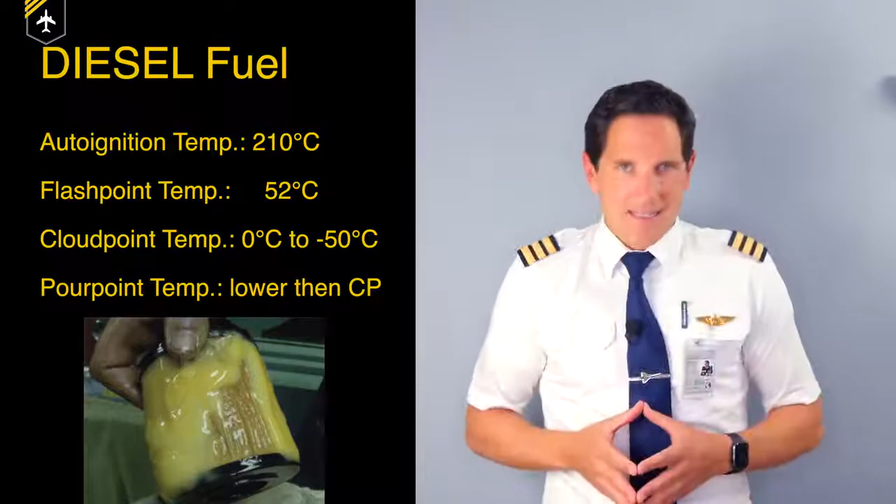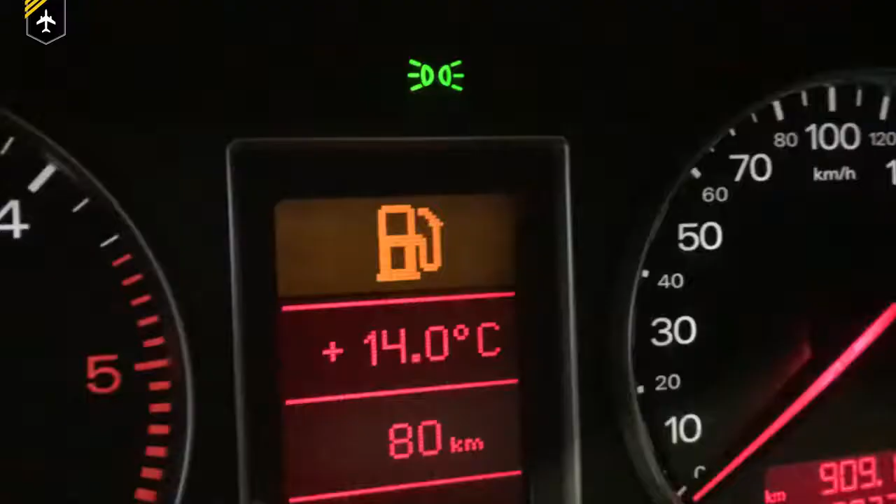Now, if your country is on this list right here, you might have heard of winter, alpine, or even Arctic diesel. Now, what's that? Let's say you were to live in Germany. These are the diesel cloud points you would be dealing with. The summer diesel with a fairly high cloud point temperature. If it were to get any colder, close to the pour point, the fuel would clog up your filter or injection system at those temperatures.

Now, without knowing, as soon as the temperatures become lower towards winter, the petrol stations fill up their tanks with winter diesel with a much lower cloud point of minus 20 degrees, so your car doesn't suddenly stop on the German Autobahn. That means the winter diesel is chemically treated to lower its cloud point, and there is a country which sells diesel with a cloud point of minus 50 degrees.

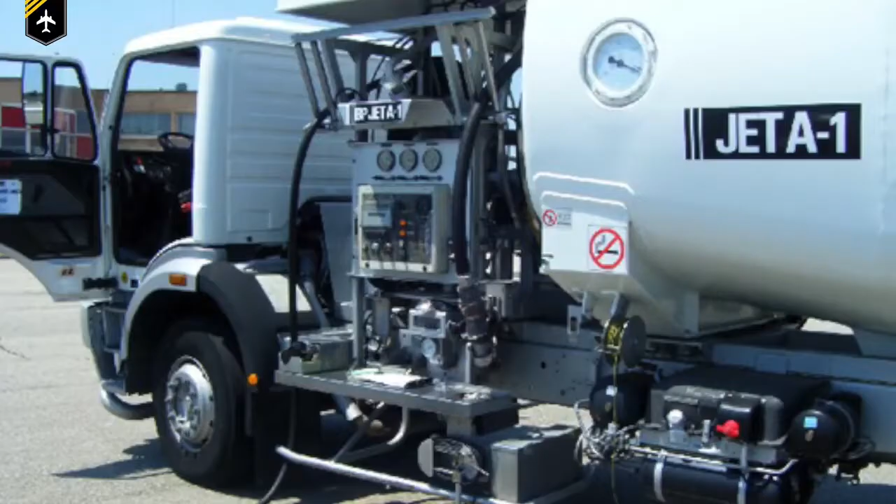So how does this relate to jet airliners? Commercial jet fuel, commonly known as kerosene, is split up into 3 major players. Jet A1, available outside of the US, Jet A, which is only available in the US, and the much more rare Jet B, which is primarily used in military aircraft and found in northern Canada, Alaska, and sometimes Russia, because of its low freezing point.

Now, I said freezing point. The freezing point is similar to the cloud point. The jet fuel becomes cloudy, and if it gets any colder, approximately 6 degrees less than the freezing point, it solidifies to wax. Write this down, as this is a common question in your ATPL theory exam. What is the freezing point of Jet A1? Minus 47 degrees. So it is much lower than your average diesel fuel from the petrol station.

And to all my American followers, yes, it is called a petrol station. I don't know why you call it a gas station. 99% of your cars run on a liquid, not on a gas.

So as the wing tanks of the jet airliner are being refueled, the fuel commonly enters at outside air temperature, let's say 20 degrees. Depending on where you are and how cold it is, fuel sometimes can be preheated before being filled into your wings. So as the plane then takes off and climbs to cruising level, let's say to flight level 360, the outside temperature plummets to a chilly minus 56.5 degrees and lower.

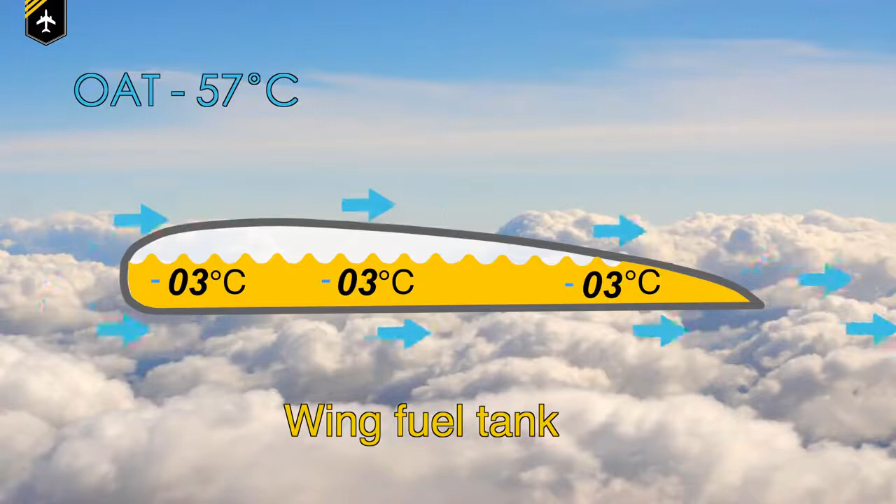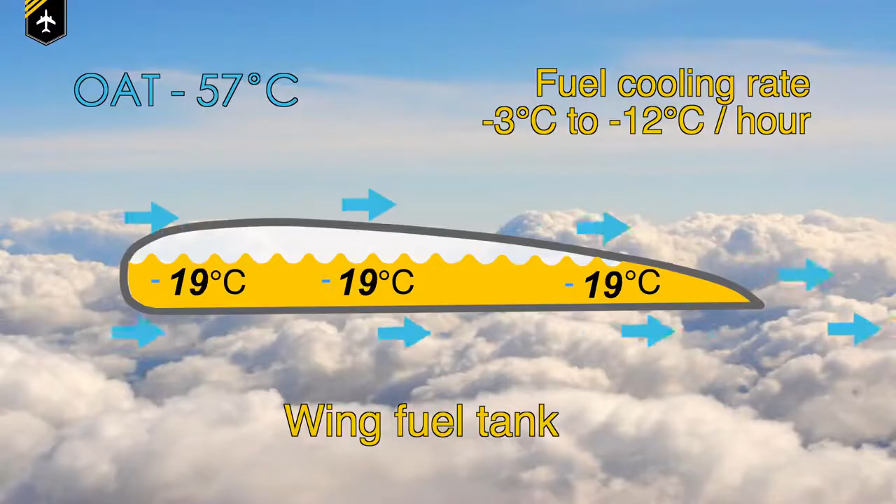So over time, the fuel will cool down as the jet fuel is in direct contact with the metal, for example, the wing, which is exposed to the freezing outside air temperature. And tests have shown that the cooling rate can vary from 3 degrees to 12 degrees per hour in severe conditions. So let's quickly look into how fuel temperature is being measured.

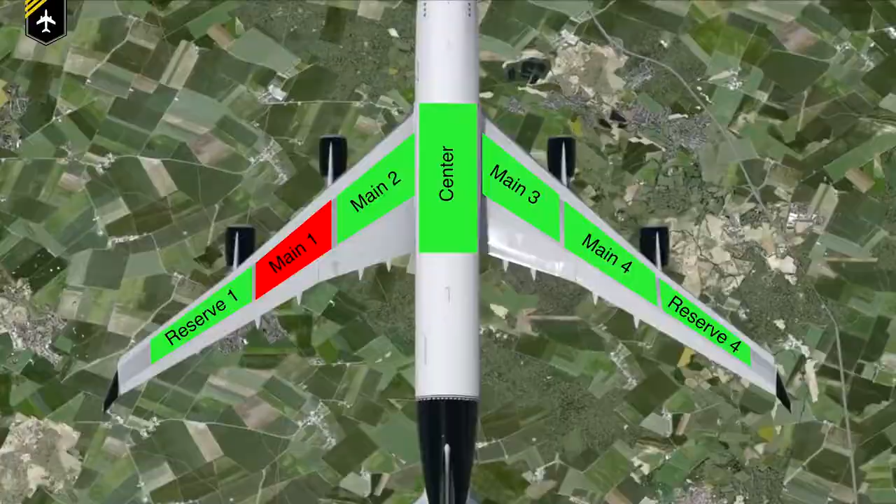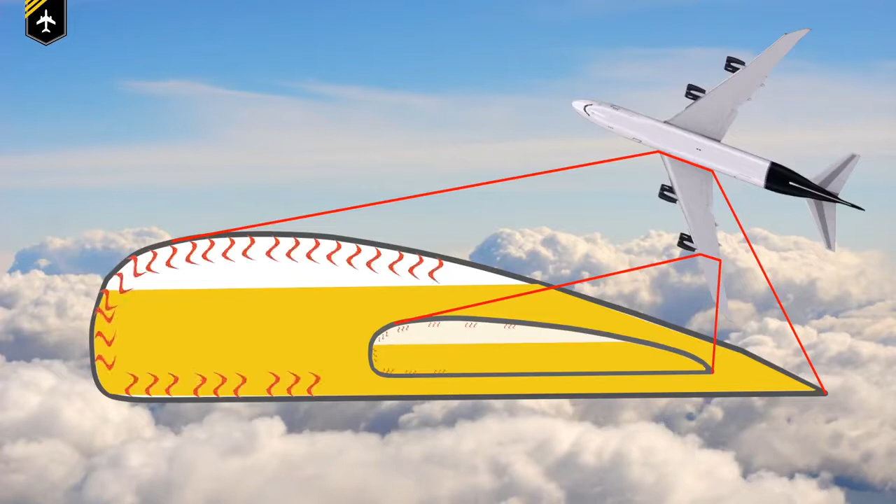Now, on the Boeing 747, the fuel tank temperature sensor is located in main tank 1. Do you have any idea why it's located specifically in that tank? As the outer part of the wing is much thinner, it has a high surface to volume ratio, meaning the fuel tank profits less from the thermal friction of overpassing air than the tank near the wing root. Plus, their volume is much smaller, so a small pond freezes up much quicker than a large lake.

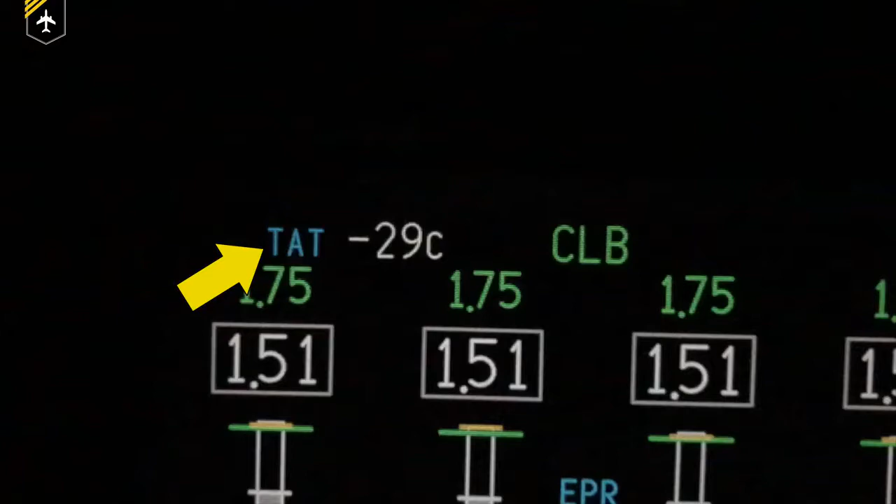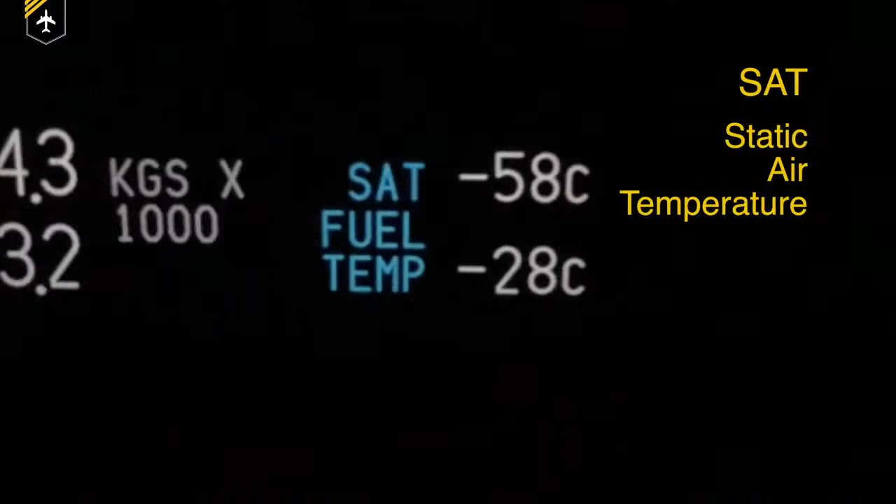Another very important indicator to monitor the fuel temperature is the total air temperature gauge right here. What is the total air temperature? The very simple answer is the airplane's surface temperature, which generally is warmer than the SAT, the static air temperature. The TAT is the result of the static air temperature and the Mach number. You can very often see its probe placed at the forward part of the fuselage.

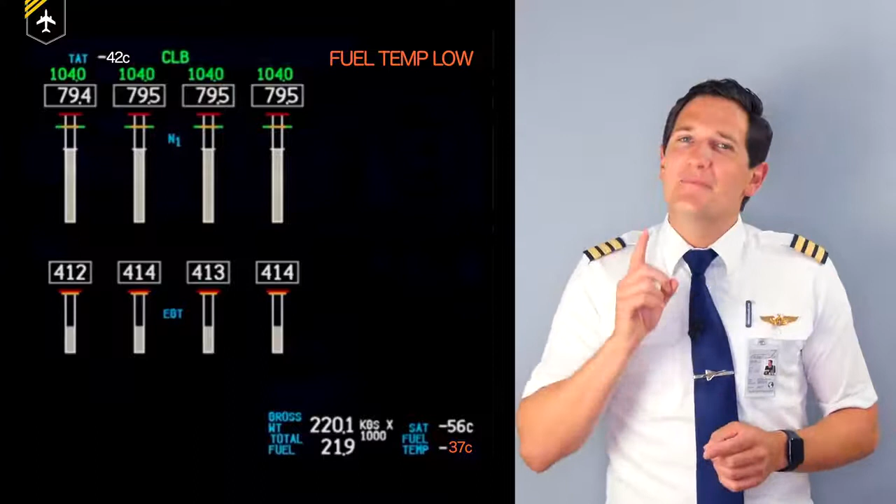So as a pilot, you are advised to monitor the fuel temperature gauge from time to time. Other than that, in case the fuel temperature reaches minus 37 degrees, on the 747, the EICAS message FUEL TEMP LOW is triggered. Now, why is minus 37 degrees the trigger for that warning?

Minus 37 degrees is 3 degrees prior to the freezing point of Jet A, which is only sold in the States, and Boeing being an American-based company, they want you to take action once that warning pops up before the fuel gets any colder. So what do you do as a pilot if that message appears?

Now, funny enough, you would have to check the fuel receipt where you last refueled your plane. Jet A1 in your tanks means your freezing point is at minus 47 degrees. So at that point, nothing really to worry about, but you would have to time the decrease in fuel temperature and compare it to the remaining flight time to not make the situation any worse. Now, a very important statement here.

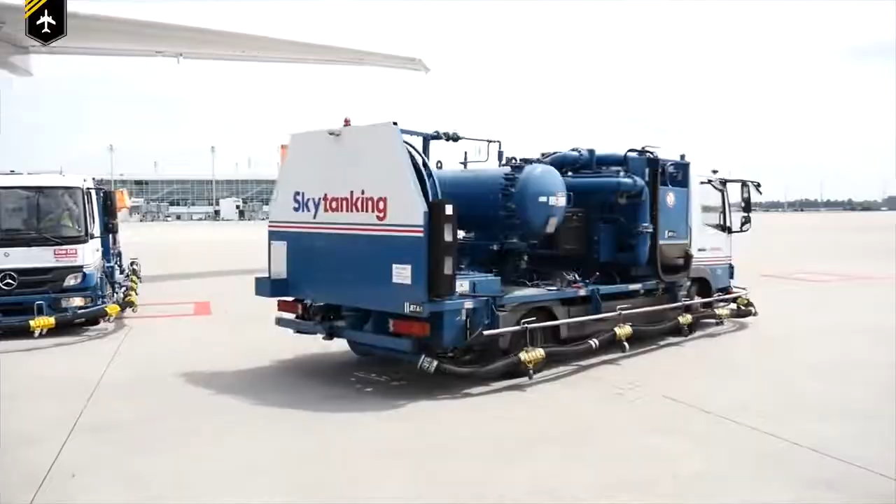But what if the plane was recently fueled in the States with Jet A and then mixed with some Jet A1 fuel from Europe? You would have to consider the higher freezing point of minus 40 degrees for the time being. Boeing recommends only after 3 consecutive Jet A1 refueling stops you could use the lower freezing point of minus 47 degrees. Makes sense, right?

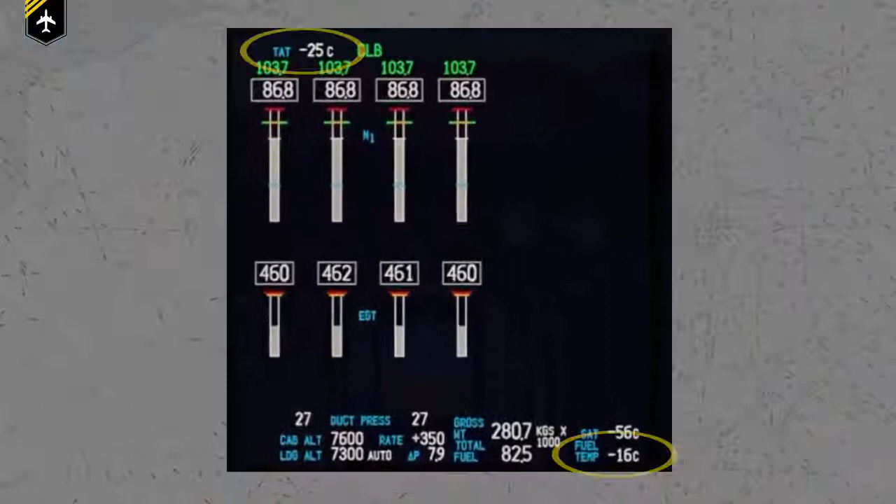So you see, there is a potential risk, especially on long flights routing near the polar areas, that fuel freezes or turns into a sluggish, waxy jello state, clogging up the fuel lines, decreasing the engine output, or even worse, letting the engine flame out. So what can you practically do as a pilot to avoid your fuel from freezing up? Now, the in-flight procedure recommends primarily to closely monitor the indicated fuel temperature and the total air temperature, as their difference is your main indicator for further actions.

Step 1, and you might think I'm joking, increase your speed. Yes, increasing your airspeed will have an impact on your fuel temperature. But how? Flight tests have shown that only a 0.01 Mach increase in speed will raise the total air temperature, respectively the fuel temperature, by 0.5 to 0.7 degrees. I personally find that quite impressive, that just that little increase in airspeed creates so much more air friction and so raises the total air temperature and fuel temperature. But keep in mind, higher airspeed, more fuel burn per hour.

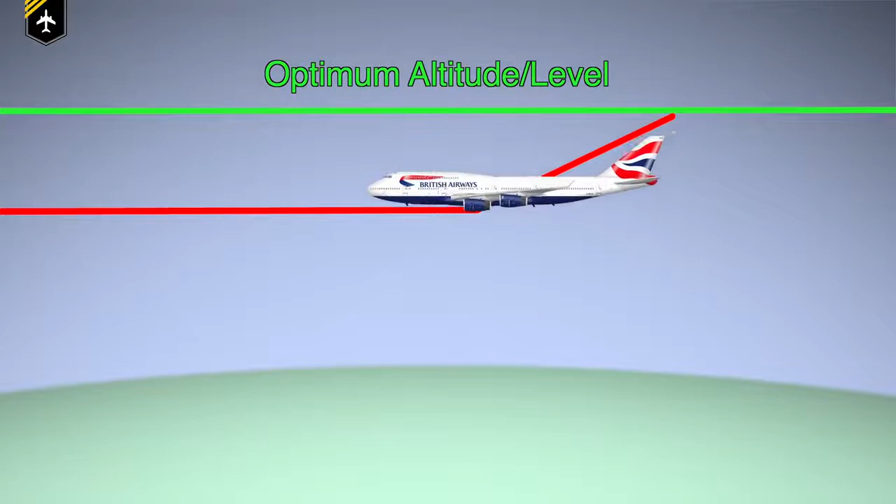The second option would be to descend to a warmer air mass. Now, the manual recommends 3,000 to 5,000 feet below the optimum altitude. Optimum altitude: the best aircraft cruise altitude for a given weight and corresponding air temperature. Again, as flight tests have shown, descending 5,000 feet in standard conditions corresponds to 10 to 12 degrees in total air temperature difference, but again, lower level, higher fuel burn.

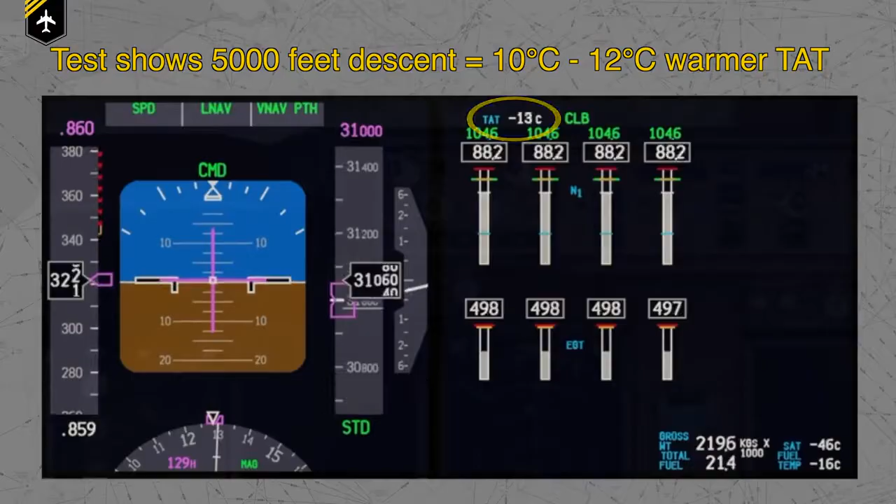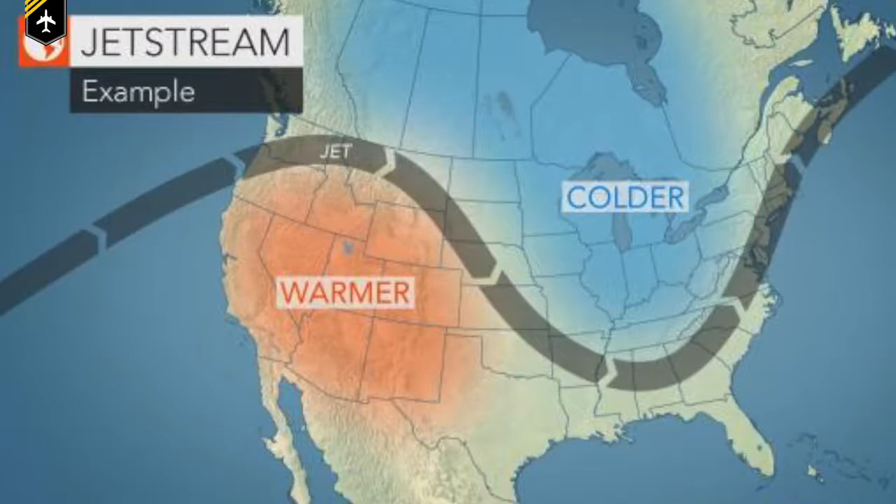The third option would be to divert to a warmer air mass. Now, for instance, if you were flying close to a jet stream, it often depends if you are on the warm or cold side of the jet stream. And secondly, the closer you are to the core, the colder it can be, depending where the jet stream is coming from and moving to.

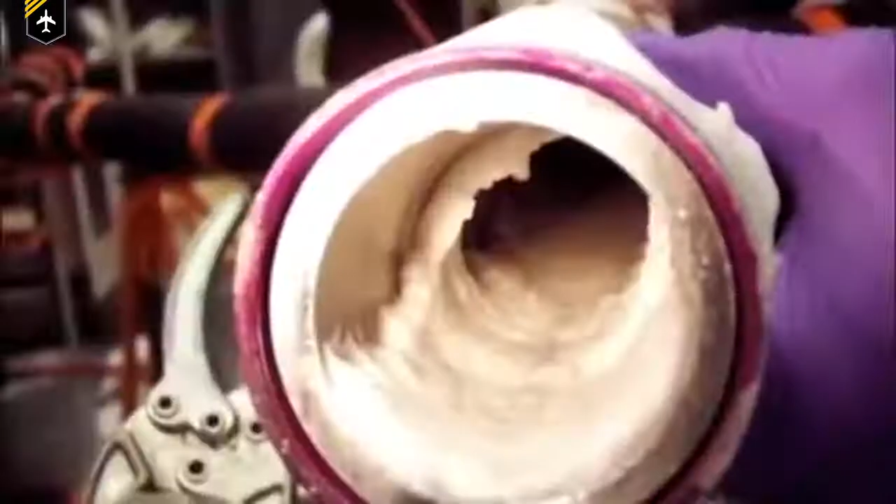Now, let's say you took all preventive measures against fuel waxing up, but there is still one more chance of the fuel freezing up. Jet fuel itself isn't entirely all fuel. There are tiny parts of water in kerosene. And water, as we all know, freezes at temperatures below 0 degrees. So in order to not clog your fuel lines towards the engine combustion chamber, airplane engineers have come up with a very clever win-win solution.

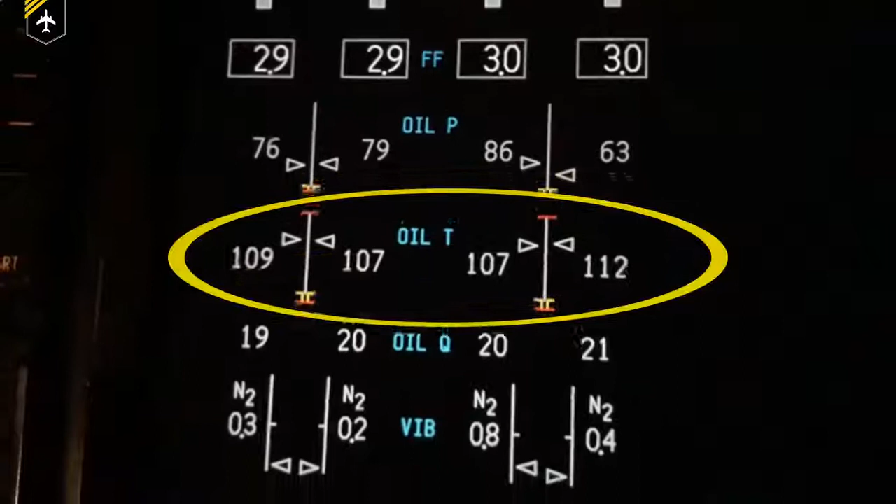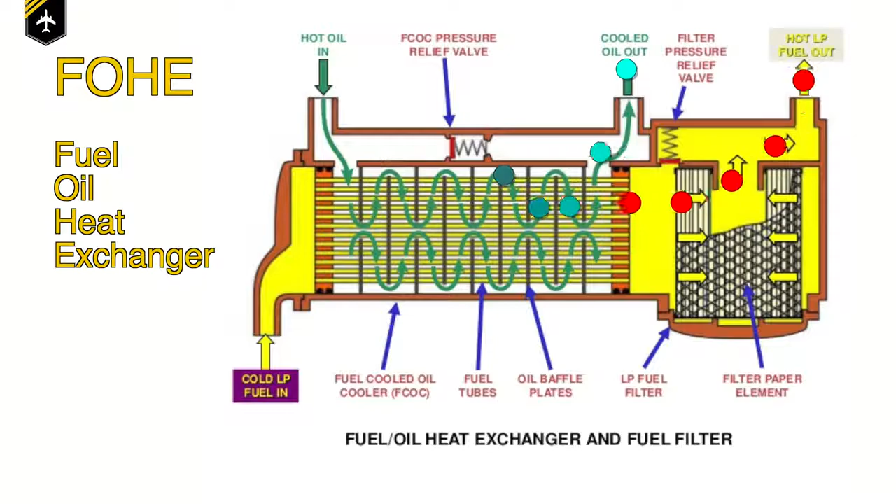They have put a so-called fuel-to-oil heat exchanger in place. The engine oil of jet turbines gets pretty hot, and as discussed, fuel gets pretty cold. So why not let the hot oil run through a set of pipes which are adjacent to cold fuel lines? So the oil temperature decreases while the fuel temperature rises. If that ain't clever, I don't know what is.

Side note, very often the engineers place warmer hydraulic lines and bleed air pipes along the fuel tanks to radiate their heat and warm the fuel. Also an option is to pump the fuel into the center tanks, as the fuselage very often is warmer than the wings as it is less exposed to the cold airflow.

A sad side note, the mentioned fuel-to-oil heat exchanger was the cause of the unfortunate landing of British Airways Flight 38 at Heathrow in January 2008. The route from Beijing towards Europe took the plane through air masses as cold as minus 74 degrees, leading to a lot of ice buildup in the fuel lines. As the plane started its descent, only little thrust was used, but upon final approach, the pilots added power as usual, which suddenly released the ice in the fuel lines, blocking the fuel-to-oil heat exchanger inlet.

The blockage caused an immediate thrust loss on both engines, and at 500 feet the plane glided towards the runway. Lacking in power, it landed short of the runway and ripped off the landing gear. Luckily, all 152 passengers and crew survived. Following that accident, the fuel-to-oil heat exchanger had to be redesigned so that it could cope with large chunks of ice at its inlet.